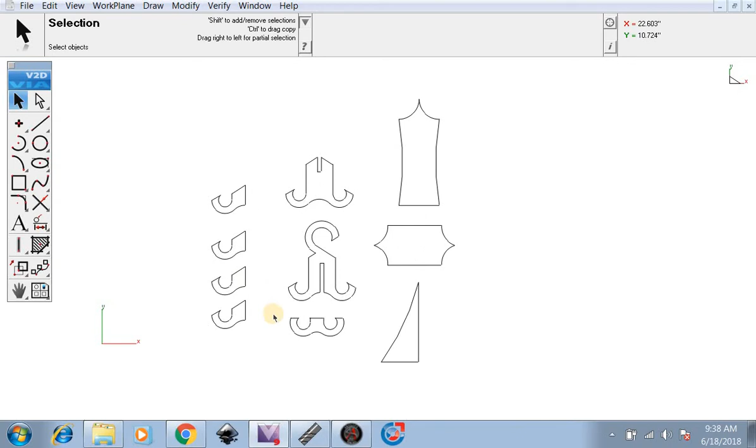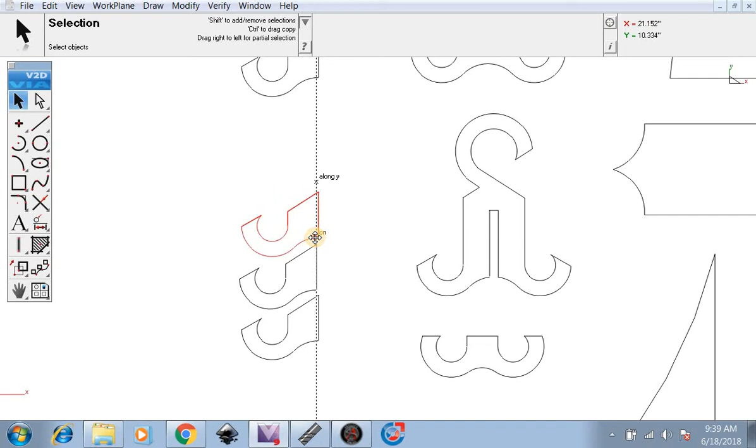So the first thing I'm going to do is click from the bottom right up to highlight, so you can move the part around. If you click from the bottom left down, it'll also move it around. So I'm just going to bring the parts real close to each other. Just clicking bottom right, click up and drag up to move it.

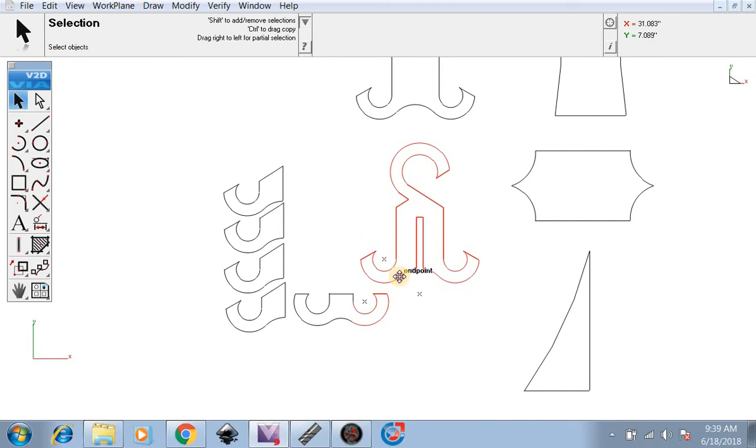We'll just do it with these other parts also. If you get too close though, you'll click both and then all of a sudden you've got a part that's loose. Just going to make sure we get only the part we need.

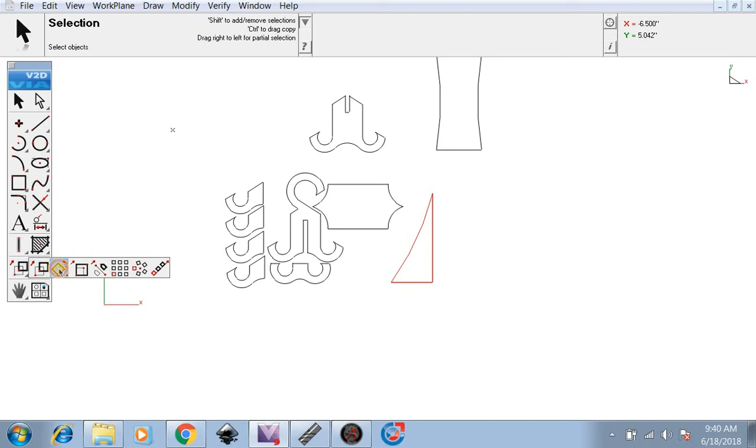As you can see, this is not really a good fit for this part. So what we're going to do is rotate the part. So we're going to go over here and click and hold down, go to rotate. Then we're going to click on the bottom left corner, the top, and then give it about a 45-degree angle. And then that'll give us a little bit of a better rotation.

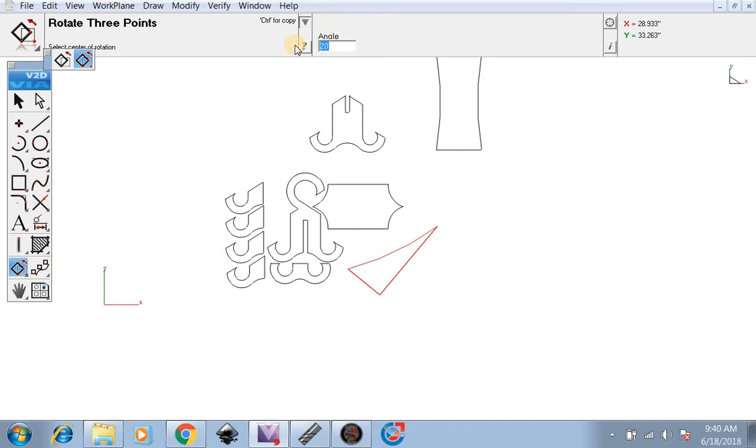We'll do a little bit more. Now let's say it's a little bit too much, you can come up here and adjust your angle. Let's do 20 degrees. We'll try 15. Now that's going to fit a little bit better in there.

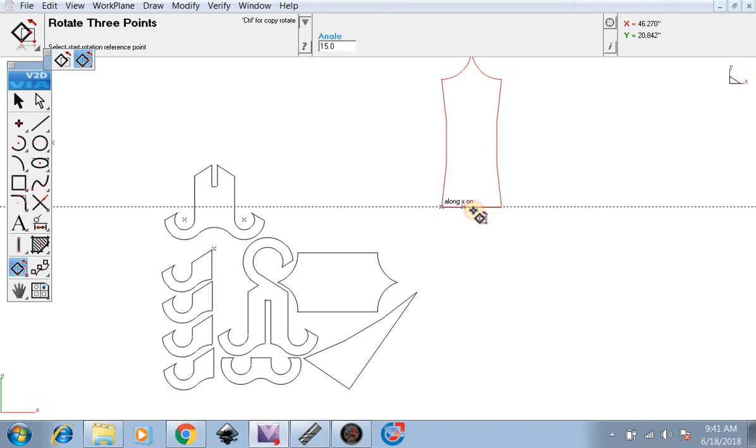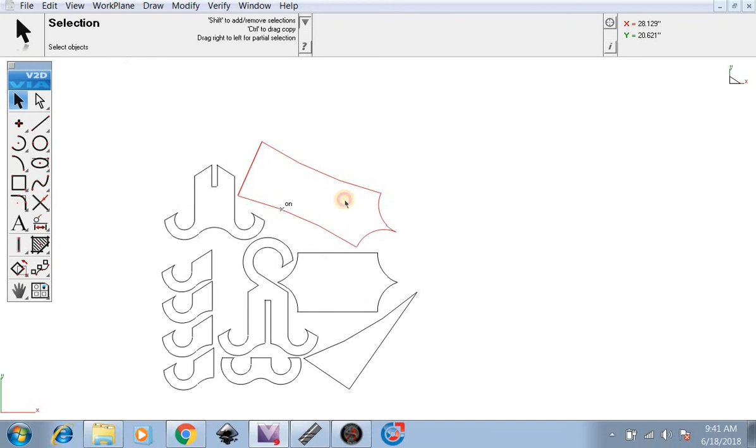Now we can place these parts. And we're going to rotate this also. A little bit too much. Now we're going to adjust a little bit more. So now these parts are a lot more compact.

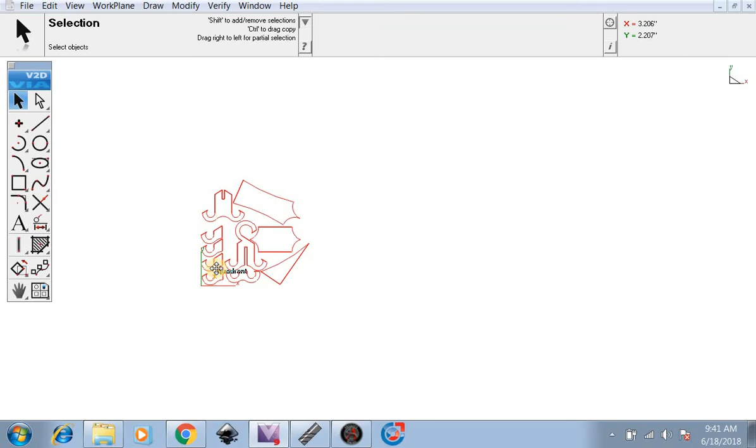So now what we can do is go to File. First we're going to go down here, click from the bottom left up, highlight all the parts, go to Edit, Group. We're going to group them all together. So now they're just one layer. I'm just going to move it and line it up with the XY. You don't really have to do this, but I'm just doing it just because.

Now we're going to go to File, Export, DXF. We're going to hit OK. Now we're going to name this Parts Nested. We're going to save it.

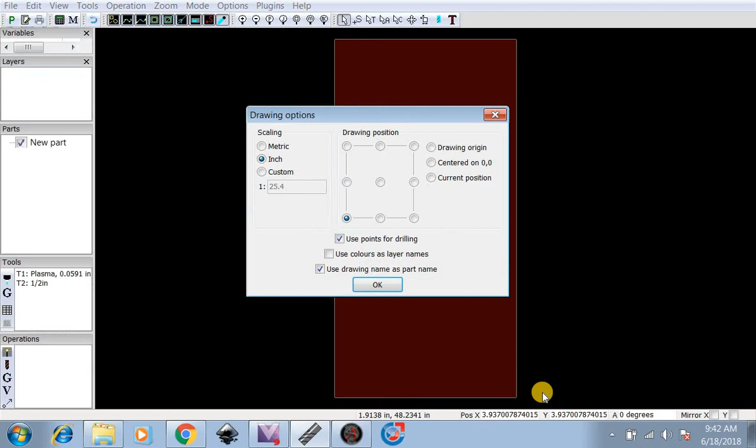Now we're going to go over here and open up SheetCam. Go File, New Part. Do you want to import a drawing into this part? We'll hit yes. There's Parts Nested right here. We're going to open that up. Inches, bottom left corner. We're going to hit OK.

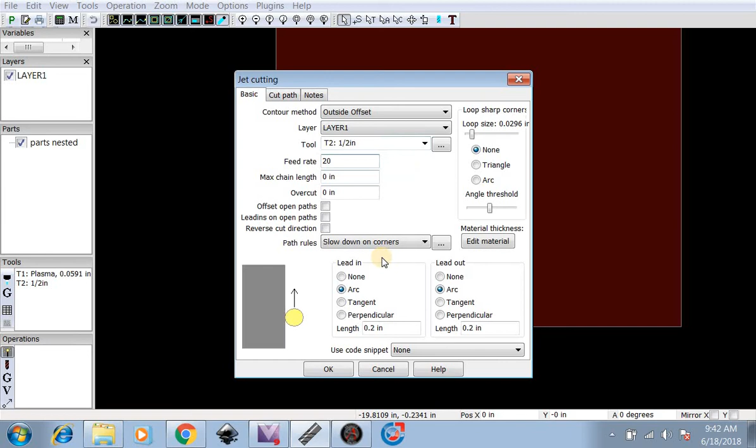Now what we could do is go down here to our operations. Since there's really no holes in any of this stuff, we can just do one layer. So we'll go Operations, Outside Offset, Layer, Layer 1, Tool. We're going to do our 1/2 inch steel tool, feed rate 20 inches per minute with our cutter. Now we're going to hit OK. Now all the cut paths have been generated.

We can also do a lead out of an arc. We'll do 0.25 inches for lead in and 0.25 for lead out.

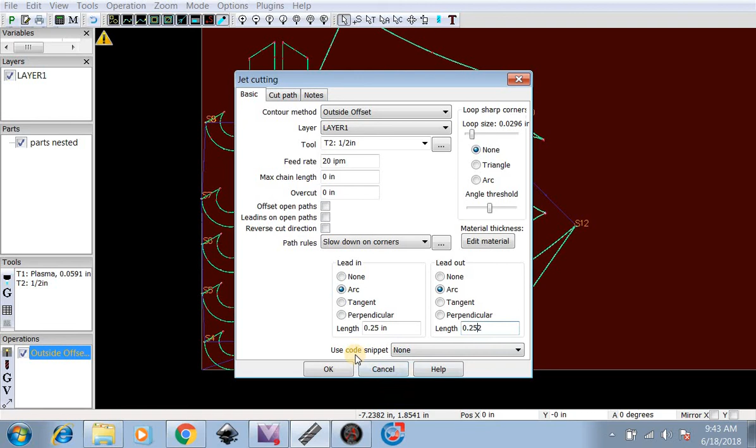After we do that, now we go up here to the top left to run post processor. We're going to save it as parts nested as G code. Post processing complete. Now we hit OK.

Now we're just going to open up Mach3, load G code. There's parts nested right here. Now we're going to zero X, Y, and Z. And then now we can start it from there and cut our parts out.